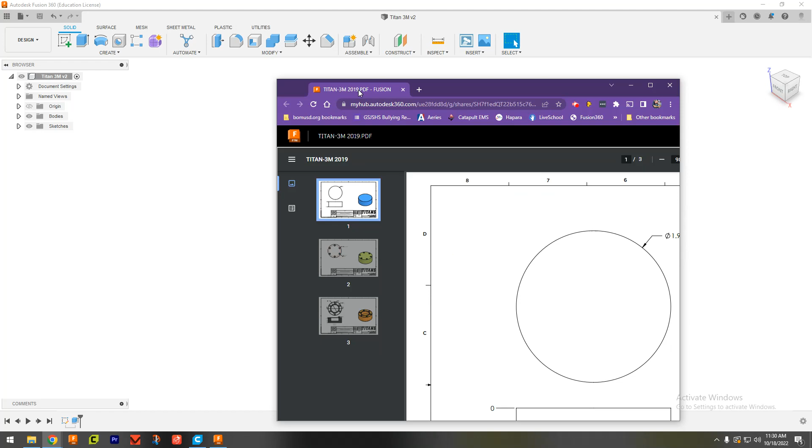Today we're going to be talking about doing a circular pattern and looking at a section view using the Titans of CNC 3M parts. If you haven't already, go ahead and get the drawing and get this main body created. That's going to be our starting point for this lesson. If you're not sure how to do that, back up and take a look at some of the previous lessons we've done.

Alright, let's move this out of the way. Here's my part, and I drew that. I'm going to go edit my sketch here real quick. It's 1.95 diameter, and I extruded it up 3/4 of an inch.

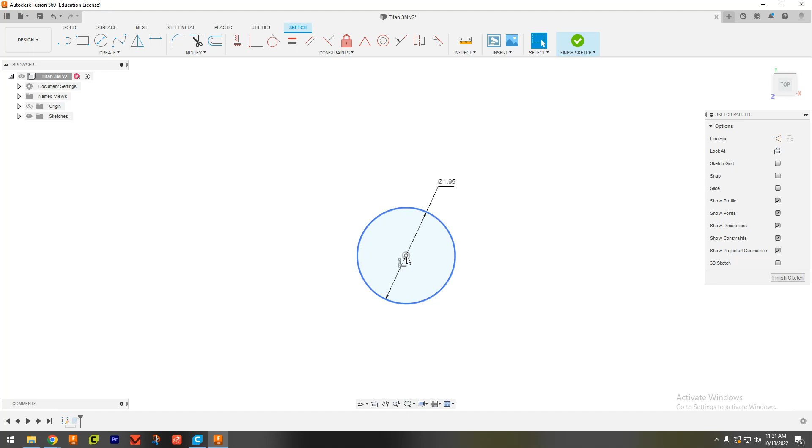I want to point out this is one of those times where you can see I have my center of my circle fixed on the origin in my workspace here. If you didn't do that, if you just drew a circle somewhere and dimensioned it, and your sketch is not fully defined, your circle is blue and you can click on it and drag it and move it around. You might want to fully define it to your origin before going on, because that's going to come in real handy here in a second.

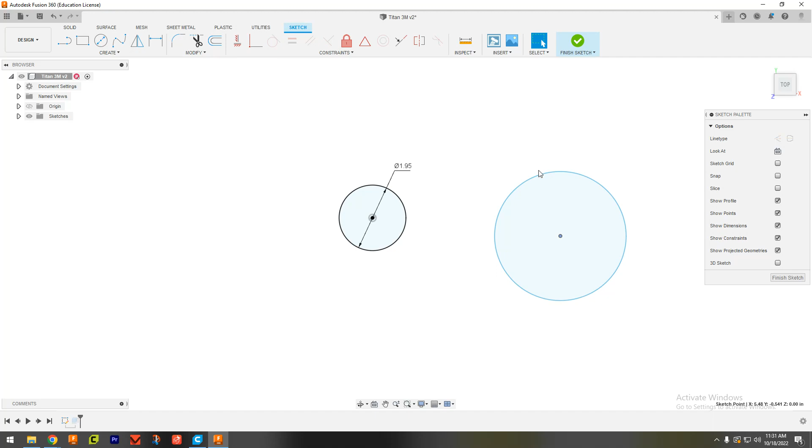I don't actually want this shape here at all, so I'm going to get rid of that. Exit that, look at my extrude, verify it is 0.75 inches, which is what the drawing called for. So that's everything shown to us on page 1. Everybody should be able to do that at this point.

So let's look at page 2. Now it gets a little more interesting. There's a lot of information here. This might look different than something we've seen before.

Okay, quick pause for coffee.

Now that we're back in the game, let's talk about this. You can see from this picture they're chamfered holes, and they have threads. We have our thread call out here, we have our thread depth, and it says there are 6 of them. And then we have this part right here, this 1.626 BHC.

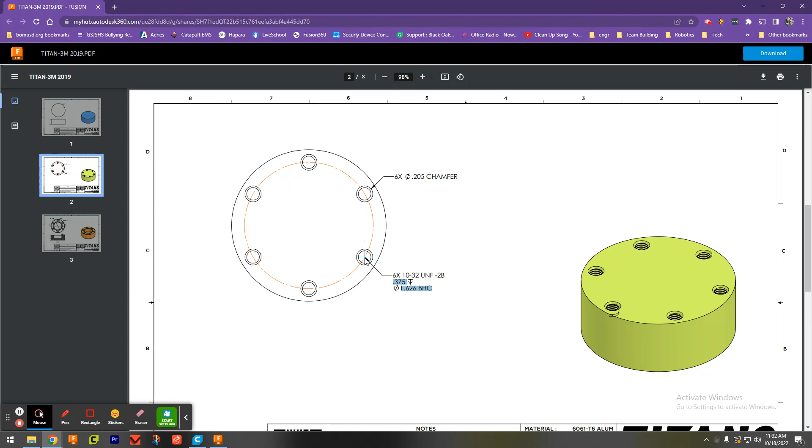This is telling us the diameter of the circle that the bolt hole centers are on. You can see this little crosshair in my bolt hole marking the center of the circle. Let me zoom in here a little bit on my drawing. So this is marking the center of my circle. This circle out here, notice it's broken up, it's not a complete line, it has these little breaks in it. That's telling us it is just there for reference, not actually a physical feature that we're going to make in our part. It's just a reference point.

This reference circle has a diameter of 1.626, and all of our other bolt holes are centered on that line.

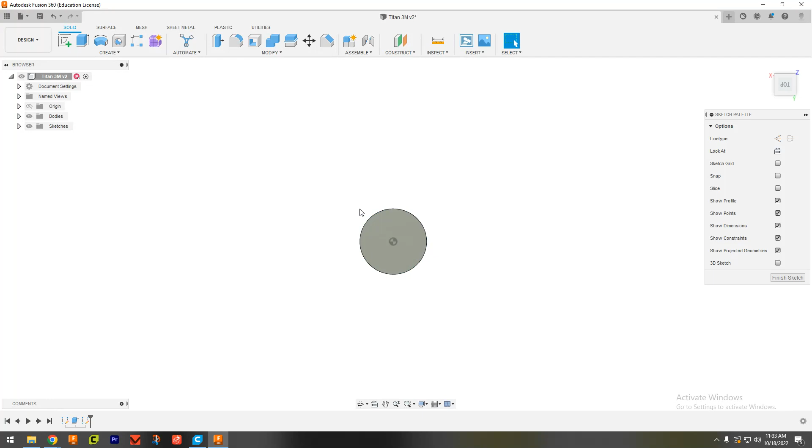So what this is going to look like in Fusion - minimize that, I'm going to start a new sketch, and select the top face of my part. Now, because I centered my part on the origin, I have a really convenient center point to start from, so I'm going to press C on the keyboard to bring up my circle tool.

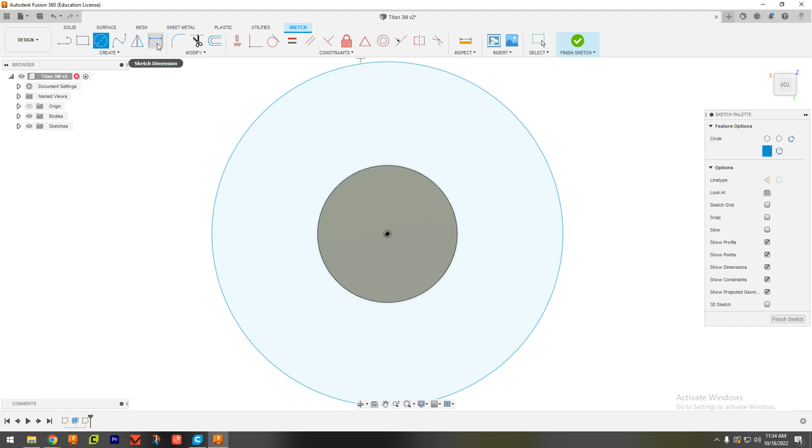I'm going to place the center of this circle right here, and stretch it out really big just to start with. I like to just throw the geometry on the screen and come back and dimension it later. So let's go get the dimensioning tool and click on that.

We'll say that diameter is supposed to be - I already forgot, let me go back and look. It is supposed to be 1.626 inches in diameter. Let's see, I'm going to pause my recording.

I got a visitor - just somebody coming up to pick up a sweatshirt they forgot, and we're going to get back to work here.

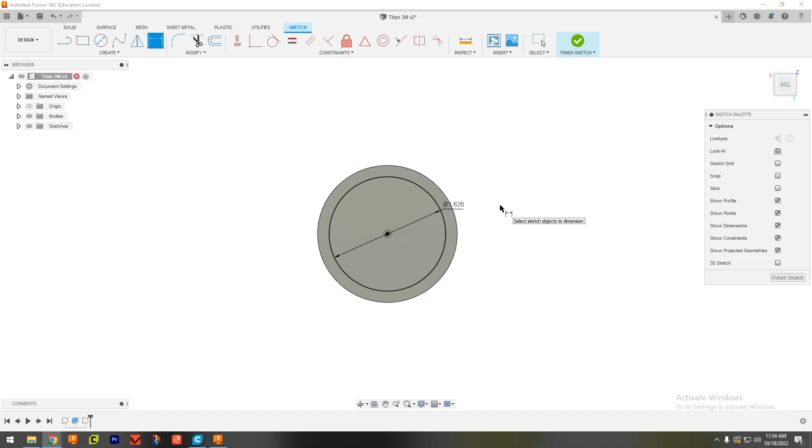Okay, so just like that, it's located and sized. It turned black, so it is everything it needs to be. Because this is just reference geometry - sorry, having a hard time speaking today.

What we're going to do is hit escape to get rid of my dimension tool. Oh, I had a different window activated. There we go. And then I'm going to click on my geometry and press X on the keyboard. X will turn it, and you'll notice up here on my sketch palette it says Options, Line Type, and Construction is now highlighted. So we have over here Center Line. If I click that, it turns solid again, and it's the same thing if I press X.

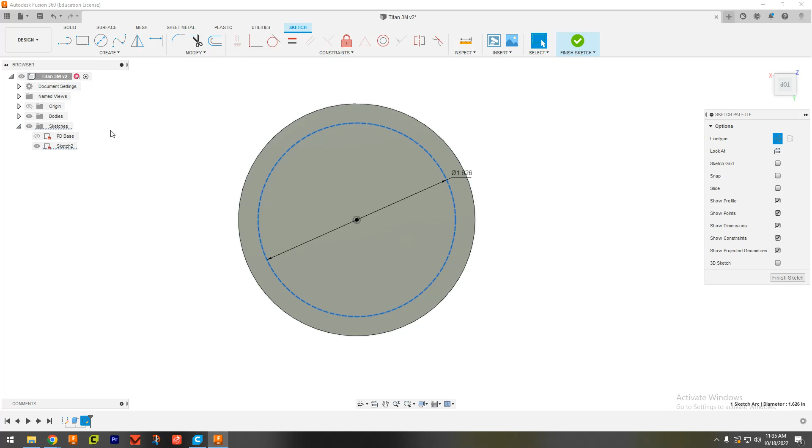I'd like to rename the sketch real quick. Let's say PD bolt hole circle, BHC. All right, get that out of my way. And there it is, you can see my circle.

Now, just like when we did our other bolt holes with Fusion, I like to use the hole tool now that I've learned how to use it. When I was an early adopter of Fusion 360, I didn't like the hole tool because there was no such thing in SolidWorks, which I was using before. But now that I've gotten comfortable using it, it's really a great tool.

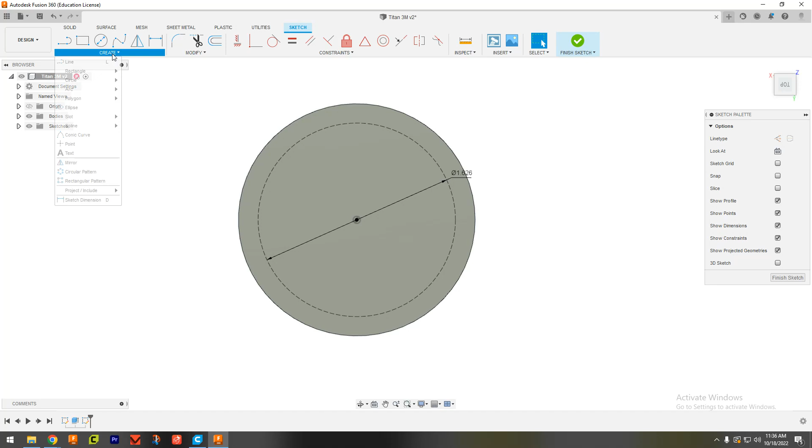So I'm going to go ahead and do this same thing back in this sketch. Let me open this up, and I'm just going to add a point to my bolt hole circle sketch. I'm going to create a point. Now I can click and add a point here somewhere.

And I'm going to click, and you see that blue X? Now I have a crosshair by my cursor, and it turns blue and turns into an X, rotates a little bit. That's going to place my point on this circle, which is what I want. So I'm just going to click right there. Boom. Now I'm going to hit escape to get rid of my point.

And there is my point, right? If I try to click it, or hover, you see this icon show up telling me that it is coincident. That means it's stuck on the circle. So I can move it anywhere on the circle that I want, but I can't take it off of that circle, which is what I want.

I also want to put it perfectly at the 12 o'clock position directly above the center. So I've got it selected. I'm going to go up here and get horizontal vertical, and then select that point right there. Now these two things have to be aligned vertically, and that point has to stay on the circle, which means it is now fully defined.

And you can see my dot turn black. It knows exactly where in space to be, and it is a point. It has no size. Points are infinitely small.

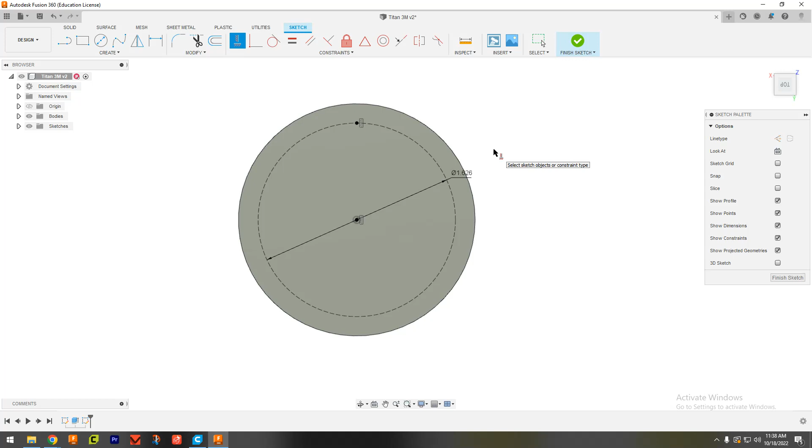All right, good coffee. Okay, so now I'm going to finish sketch again. Now I've got my bolt hole circle and my point.

So it's time to bring out my hole tool. We'll say placement is going to be from sketch, and we'll click on that point right there. And we get that giant hole. It's okay, we're going to fix it here in a second.

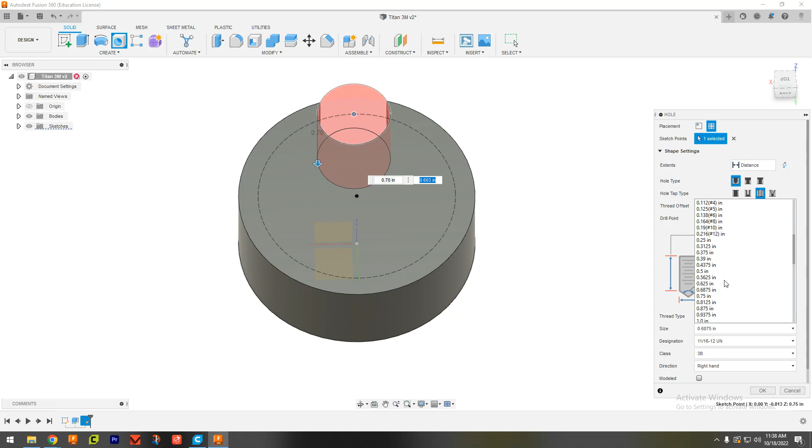And then let's go back over to my drawing. Let's see, I wanted a 10-32 UNF with a 0.375 depth. So I'm going to say I want to be a tapped hole, and let's go to size and see if I can find number 10. There we go, number 10 right there. 10-32 UNF. Did it say 1B, 2B?

Specify. Let's go back and look at the drawing again. It says 2B. Okay, so we'll make this 2B, right hand. Make sure we tell it to model them.

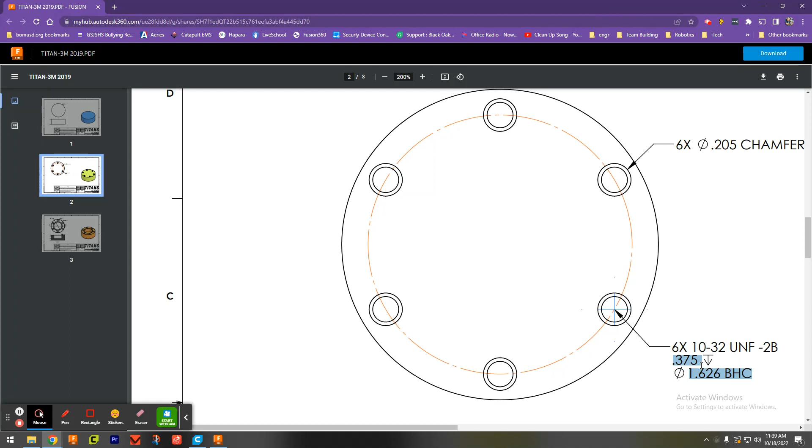All right, what else does my drawing have for me? Let's go look at, where is it? Oh, there we go. I should just keep this up on the other window. And my drawing said, oh yeah, thread depth of 0.375. So let's go over here and tell this thing, okay, I need my thread depth to be 0.375.

All right, you see my hole sort of adjusting. Okay, and then if I add an offset, that adds a whole bunch of stuff, so I could do 0.375 for my thread depth here by just changing this to an offset hole, 0.375.

All right, which means that this depth, oh, that's the offset from the top. Wrong one. Sorry about that.

0.375, and then we'll say we're actually going to drill 0.4 total depth. All right, so we have a little bit of space in the bottom for chips and things to land. Our threads are going to go 0.375 deep. This is a little bit extra.

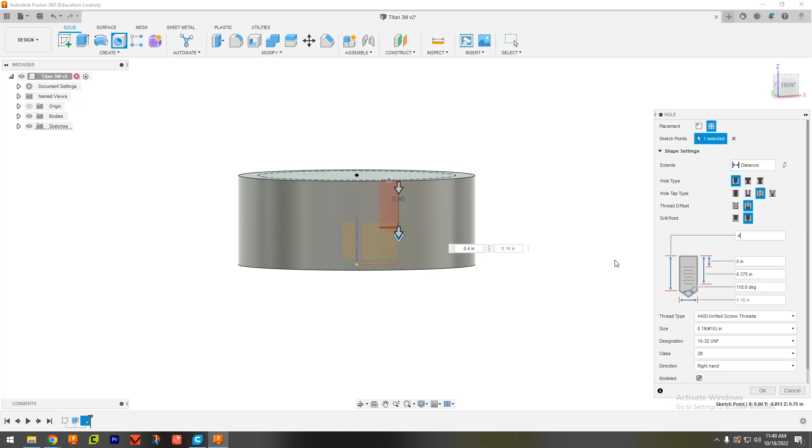If you get a threaded hole at this point in your CAD career, and you get this depth of 0.375 with the correct thread pitch in there, we're okay. If you want to go the extra mile, if you're interested in learning to do this well, maybe you want to do this for a living someday, then we should put in those offsets.

And if you're going to take engineering 2, we want to start thinking about leaving room in the bottom of our hole so that when we go to run the tap in there, the chips have somewhere to go, right? Because if the hole fills up with chips, then the tap can't get down there deep enough to make the threads. And the other thing our drawing said is that it should have a chamfer on those holes.

Back to my drawing, it says a 205 chamfer diameter. Go over here and tell it it's going to be a countersink hole with a 0.205 diameter on that. All right, that gives me that counter diameter, 205. That'll do. Okay, that should be good, so we'll just say okay.

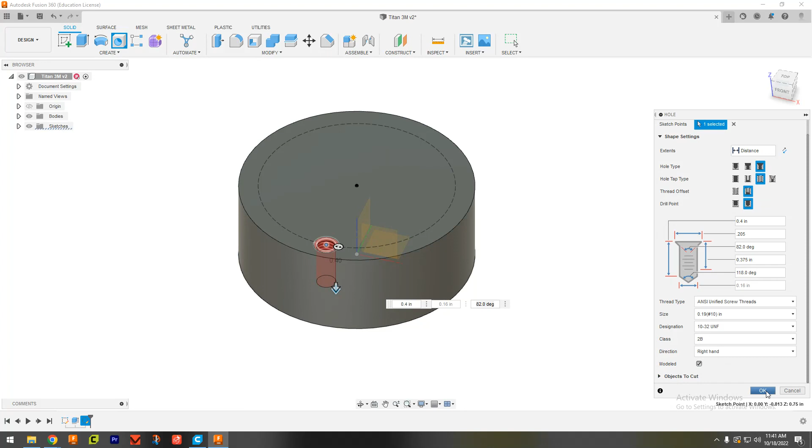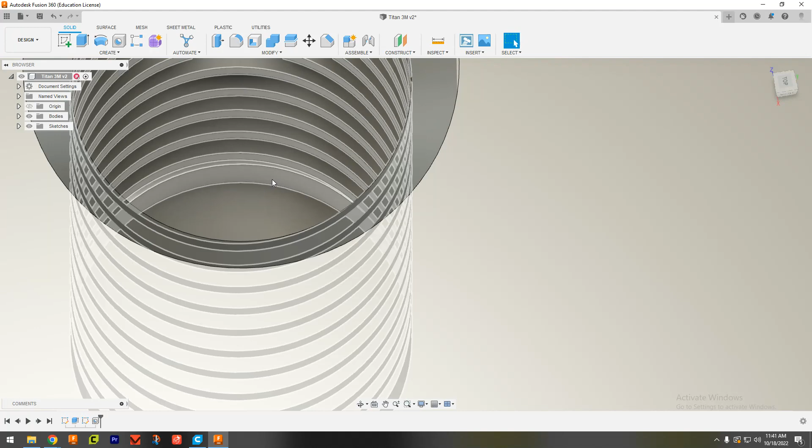Bam, there's my hole. I've got a nice chamfered edge on it. Go to inspect, make sure I get 0.205 diameter on that. Okay, looks good. You can look inside and see there's a little bit of space down there. That might not realistically be enough, but you can see the threads end before the very bottom of the hole, and we have that drill point shape going into the material.

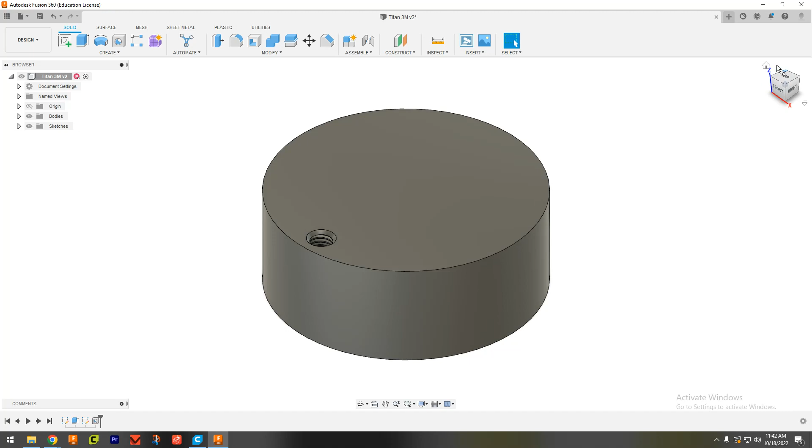So let's go back to my main view, and we are looking at only one hole here, right? But we needed 6 of them, so that's where the pattern comes into play. I'm going to go look at a top view, flip this guy around. I like to put it at 12 o'clock - it's just nice for me, but it won't matter here in a second.

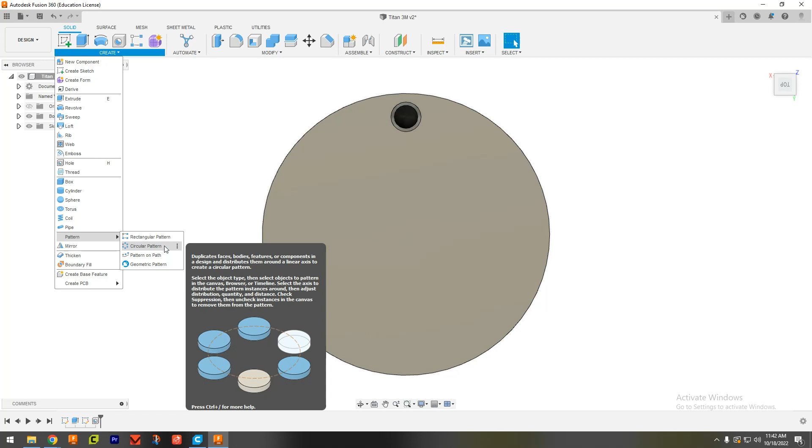So let's do a pattern. To do a pattern, we're going to go to Create, and we're going to go to Pattern, and choose Circular Pattern. Now we get the little pattern toolbar, and we can switch types - oh, actually I meant rectangular. So now I can follow straight lines, or we can even have some arbitrary path to follow.

We want circular pattern. The objects that we're going to make a pattern out of - we're going to do features, all right? 99 times out of 100, I select features for object type.

If you select bodies or faces, you're going to get some weird results. So if you go do your pattern and it doesn't look right, the first thing you should check is what kind of object you were selecting - make sure you're on feature, okay?

Next, we're going to come over here and select our hole - we can click it right here. Sometimes what I like to do, just as a check for myself, is come down to the timeline and select the hole there. The reason is because if I forgot to select feature up here, and it was on faces, and I try to come down here - well, I guess it still does let me. It didn't used to, okay, never mind that.

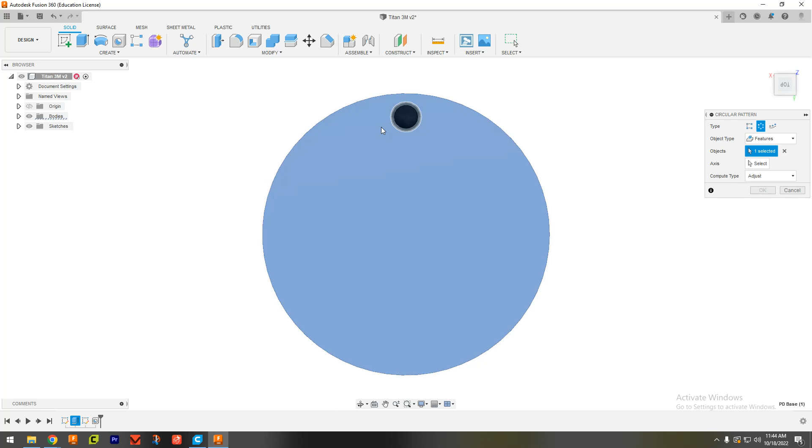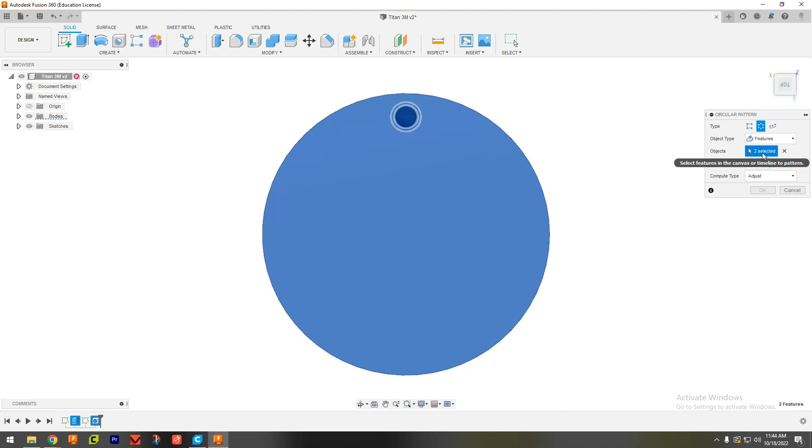But anyway, sometimes it's easy to accidentally click a face right here - oh no, I meant that hole. Now I have the whole thing selected. I'm gonna deselect everything, hit that little X again. Let me show you - if I click, oh, I got too many things. Okay, let me just take a breath. Let's back up, come over here to objects - it says I selected 2. I don't want 2, so I'm going to press the X. They all go away, we're going to try again.

Okay, so now let's go select my object, I'll just click it here this time. All right, and now I have to tell it an axis - where are we going to circle around? What am I going to follow with my pattern?

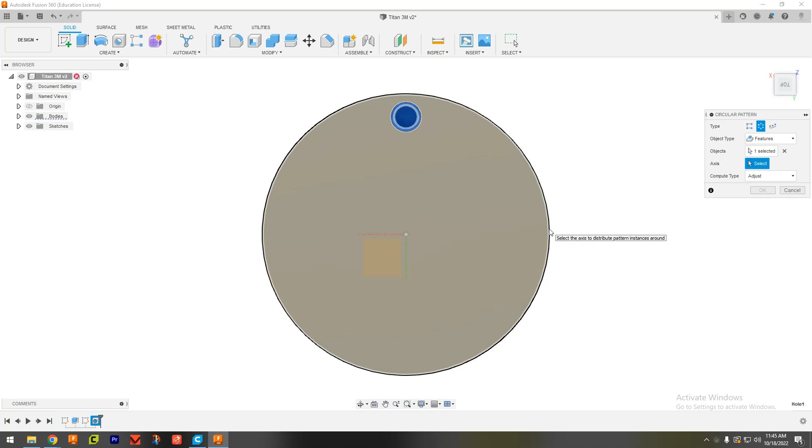To select an axis, I can select any surface that goes in the correct direction, so I'm just going to select the outside edge of my circle right here, because I want to follow. You'll notice I didn't select this construction line - I could, if I turn that sketch on so it's visible, deselect my axis, and use that as my axis instead. Anything that makes a circle will tell it to follow the circle, and the holes will stay connected to this construction line because this first one is. If this first one wasn't, your other ones would also have a problem.

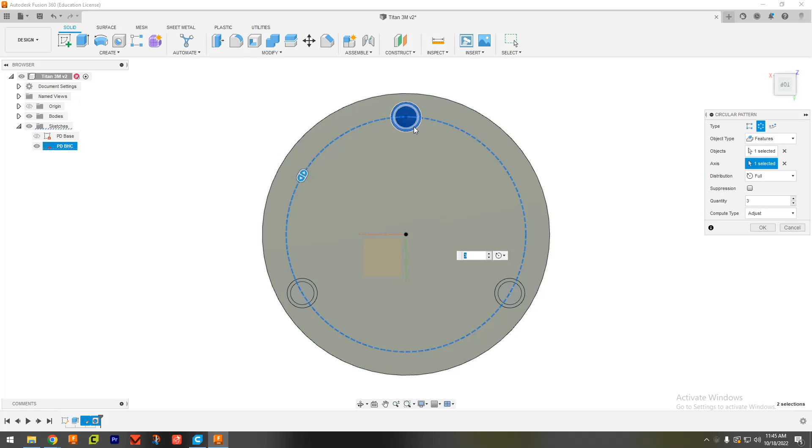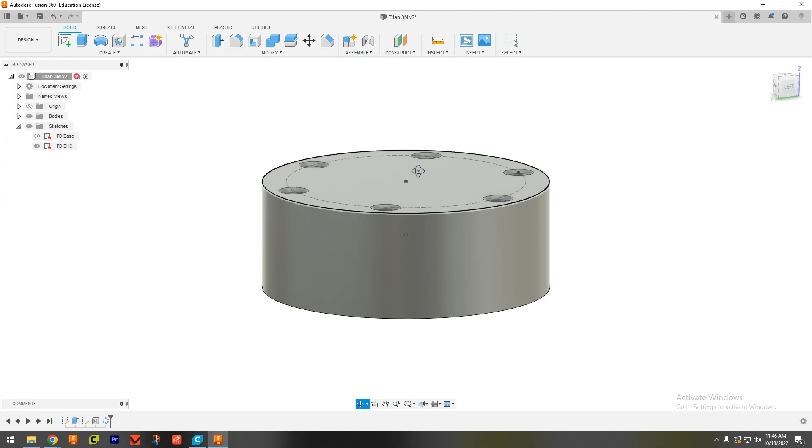So next thing is I do want to go a full 360 degrees, and I want a total of 6 holes, and then we'll just leave that on adjust. We'll say okay, and voila, just like that - 6 holes, all made in a pattern. Turn that sketch off - there is my part. Okay, so that is the video on circular patterns.

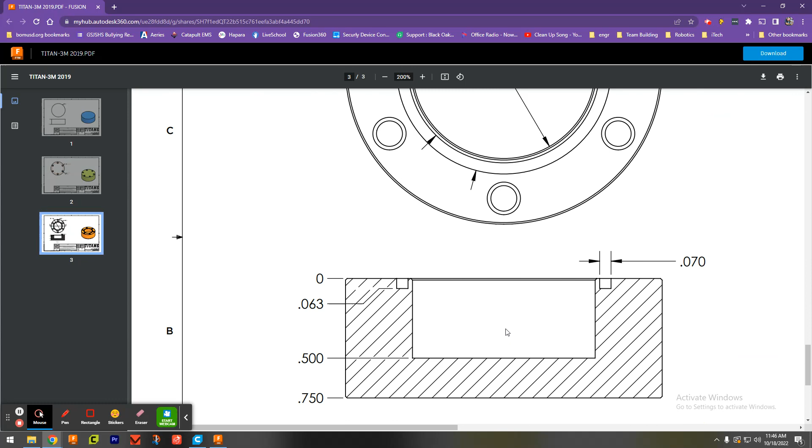Go ahead and do that, and then we'll move on to the next part. We'll look at our drawing and talk about what's going on in this page with this whole split and this - what am I looking at, what is this? Okay, we'll save that for the next video. You guys get your bolt holes patterned correctly before you move on to that.